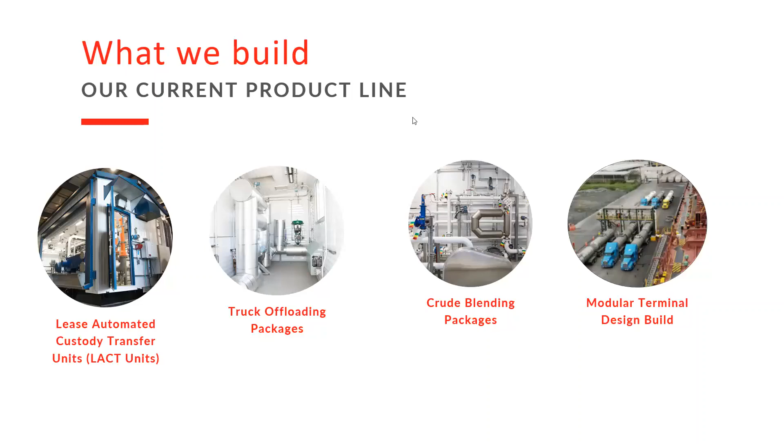Okay, so the quick version of who Sky is, if you haven't had those introductions, and what we do: you can see the variety of products and applications that we're involved with, from design, build, or concept ideas to fabrication and installation and assembly and ongoing services. So a variety of refined fuel applications along with crude oils, really depending on your niche.

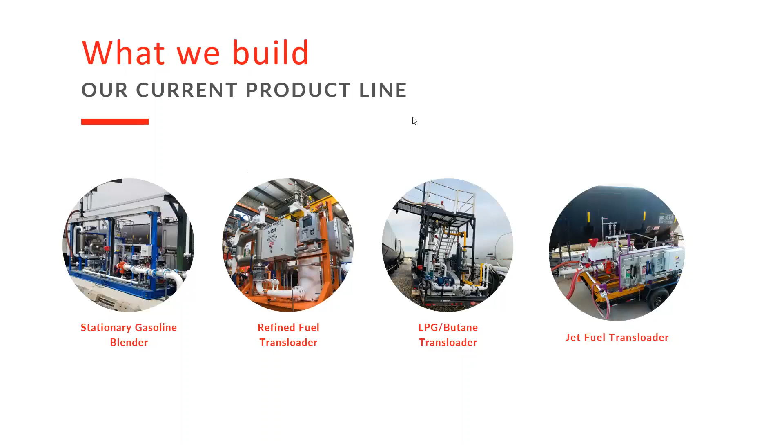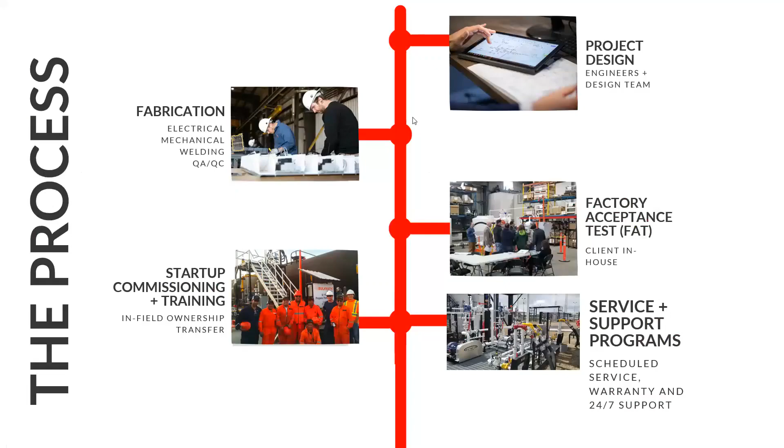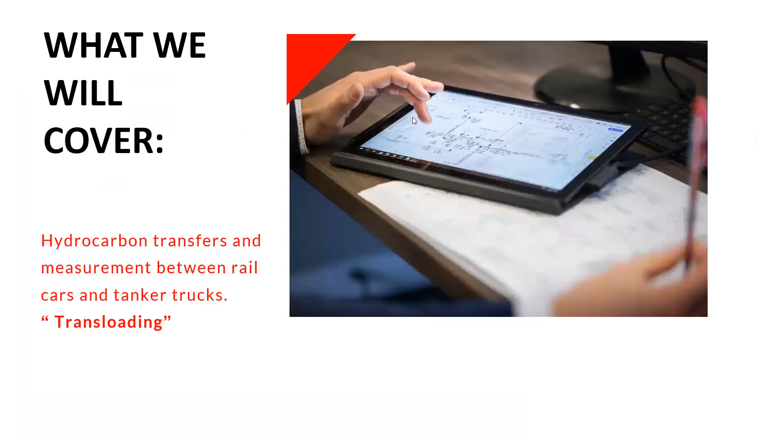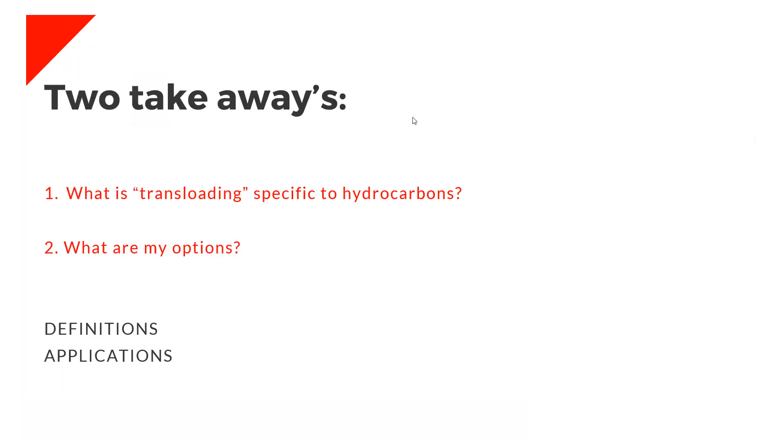Okay, to the topic at hand. What we're looking at covering here today is a bit of a basic or fundamental description of transloading and what that means for the people that we work with for the most part, and hopefully there's some relevance for you. And the goal we'll try and achieve here is, first off, hopefully you can take away an understanding from our perspective of what transloading of hydrocarbons means, and then really what are some of your options relevant to a variety of these products, be it crude, diesel, gasoline, and propanes.

And to put it quite simply, transloading, just to pull it out of Wikipedia, is really just the process of transferring shipments from one mode of transportation to another. And to keep it that simple, what we're going to try and do is give some perspective through the supply chain that there's many different scenarios that these commodities can be going in and out of those modes of transportation.

And what we'll try and show you is some solutions for those, not only in the transfer of, but the measurement of the products. So certainly on the crude oil side, you've got your production, and then we have refining, then we transition off to the refined fuels. And as you all know, in the variety of industries that you're in, the products can go in and out of those modes of transportation many times. So we'll try and clarify some of that for you.

John, what's an example of that, as far as an experience that we've had where we've loaded LPG here in Canada and then it's arrived in Mexico? Yeah, it certainly happened for us. Canada, with low commodity prices, we're really a source location for products. So we've literally loaded LPG into rail cars from trucks in Alberta and offloaded those same rail cars in Mexico. And that was to our surprise. So it's a big world, but it isn't really at times.

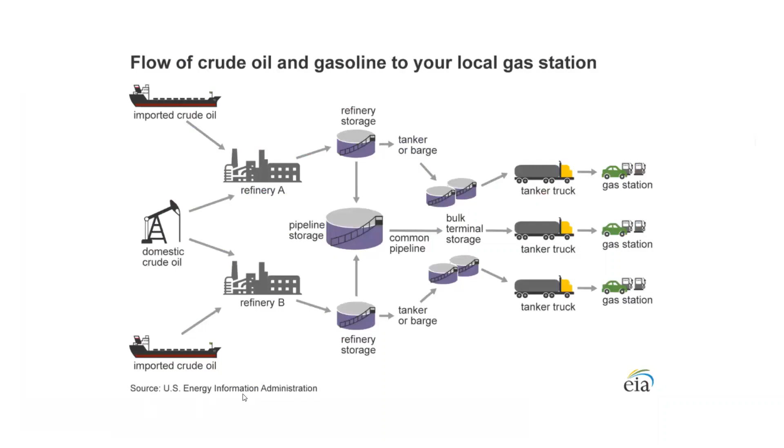So we hit that last mile. Certainly do. Mexico. Yeah, the final destination is typically retail consumer, but some industrial. And I'll try and show examples of that throughout. So we go right back to the beginning source for perspective for some folks. Maybe we've got some people that are in the trading firms or commodity traders, et cetera. This is really where it all starts.

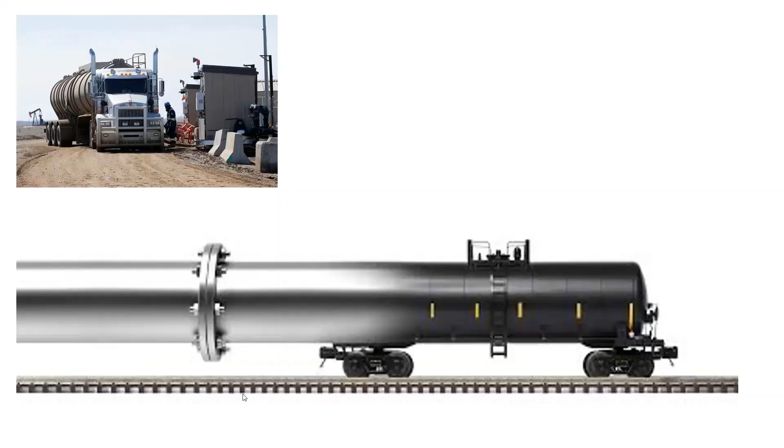We've got well site production volumes. They're going to be cleaned up somewhat to a clean oil state, and literally you're transloading that in a sense, or transferring it, potentially metering it, a lot of times into trucks. Could be into pipelines, it could be into trucks and pipelines or some sort of infrastructure. But the point is that throughout the supply chain, rail certainly does play a factor. So we're going to reference rail and truck specifically on this webinar and try and give you some examples of how we execute those applications and a variety of builds that we do. Where rail fits into the supply chain process.

You bet. This is a good little diagram of the variety of transload, if you will, or the variety of transfer solutions that can happen. We build LACT systems, of course, as well, and we do get involved in ships, but truck and rail is what we're going to focus on, and it can go many times in those forms.

What about, have we engaged in any type of barge or marine? What does that look like? Yeah, very similar at times. Potentially ship and barge might be transferred in higher volumes, and larger equipment, certainly. And it's all economies of scale, right?

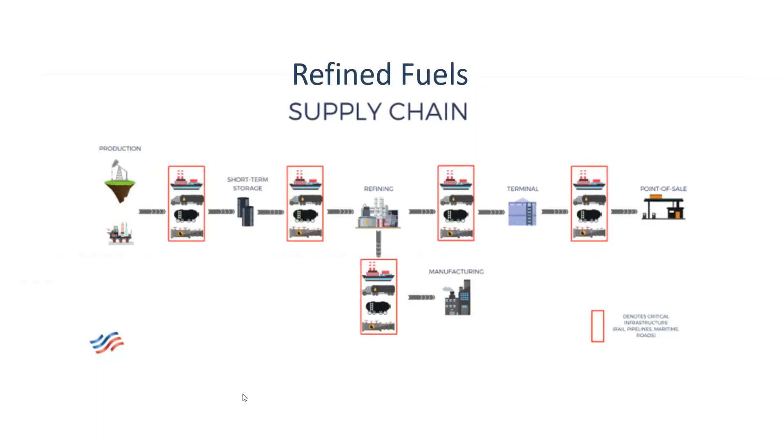We certainly know that pipeline is an economy of scale, the most efficient form of transfer, best bang for your buck, if you will. Then really, depending on geographic locations of consumer and provider, ships play a part, barges play a part, then you move into rail, and then you start moving into the trucks. And so many times it's in and out of those more than once.

So at a very simple level, we have trailer units, rapid deployment, lower cost trailer units, and these can be executed quickly, very common. But we'll show examples of how this is morphing into modular build, stationary equipment, and then larger terminal facilities. Then we'll try and point out some of the things to keep in mind in these scenarios.

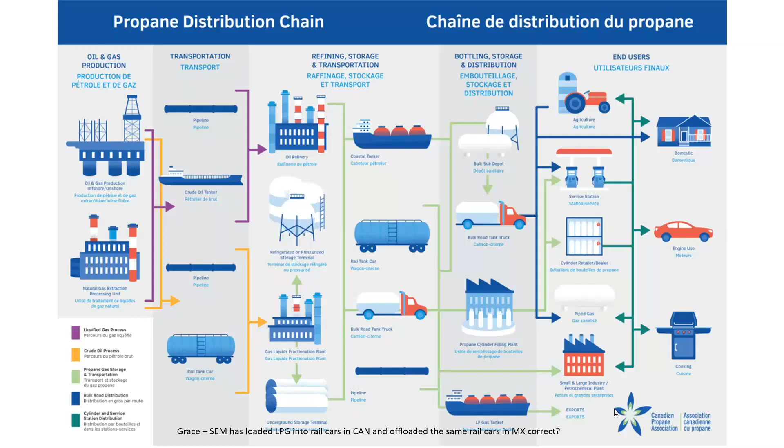And of course, final destination, really on the refined product side, we're right down to retail consumers. And then I'm going to include, of course, the LPG or high vapor pressure applications of refined products. Very similar at times how these commodities are moved, the propanes and the butanes. And they do go in and out of different forms of shipment, pipe, truck, rail, and ship. And we'll try and work on some of those fundamentals here also.

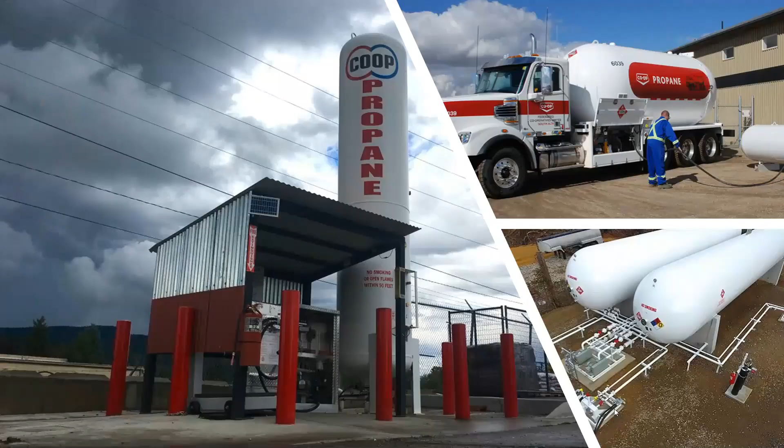There we are, we're transitioning from rail to truck for final delivery. And that's an example of a transloader trailer unit, portable unit, to execute that task. And again, back down to retail consumers or industrial. There's a variety of industrial applications outside of the retail, home heating or offices or power generation, etc.

So let's move on to the next phase of transloading. We've talked a little bit about what it really means in the hydrocarbon space relevant to crudes and refined products, in that it's a form of transfer and measurement of it. I think we'll move into a little more detailed perspective of the techniques used, or the equipment used.

Do we want to take a couple questions? Were there any questions in there that we wanted to, maybe prior to getting into this next piece? Sure. Let me have a quick look. Let's see. Well, okay, what do you got, Grace?

Well, from James here, will you be going over economics in comparison of average cost per barrel to pipeline to understand the difference? Well, what I can do is give you some perspective of cost, and we'll keep that in general terms, and certainly let's follow up outside of the webinar to try and put some of that in play for you.

I'm not going to have economics on pipeline movements or ship rates. We can certainly tell you our costs for the equipment to do the transfer and measurement in a variety of scenarios, but I don't understand the rate costs on the commodities. We get into the solution to design build portion, but we can certainly talk in the future, James.

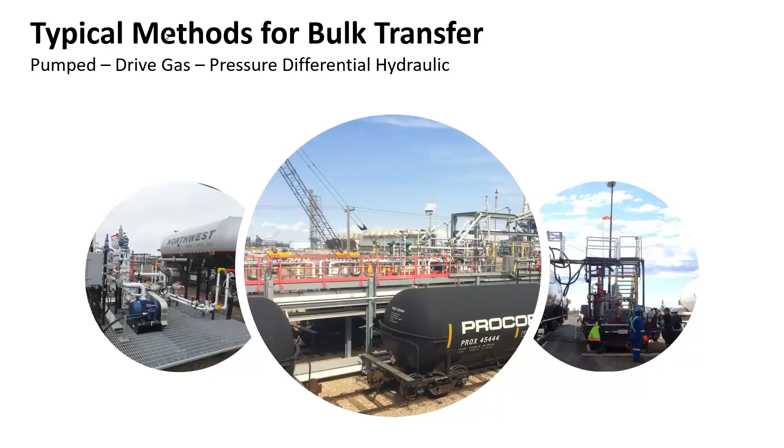So typical methods of transfer. Again, we're going to keep this very simple and narrow right now, and focus in on general categories, if you will. So from a crude oil or condensate perspective, when we start to look at designing, and our engineering guys have to get involved and put some clarity to the application, we categorize crude oil and condensates, stabilized condensates, as a low vapor pressure product or a liquid form, and they're going to be pumped.

Now we separate crude and condensate just a little bit from the refined products because it is raw crude, and there could be solids, it could be sour, it could be water. There's a variety of contaminants that can be in that product that we deal with a little bit differently than we would the refines. The refines are coming out of their consumer spec, to a certain quality level. So the equipment is a little different, but very similar, but it is a pumped and inline metered application.

So we categorize low vapor pressure or stabilized liquids as one type of transload application. And then the other would be high vapor pressure product or non-stabilized product that's under pressure when we transfer it. An example would be propane. And most often when we're doing truck and rail transfers, we're using a compressor and hydraulic differential pressure.

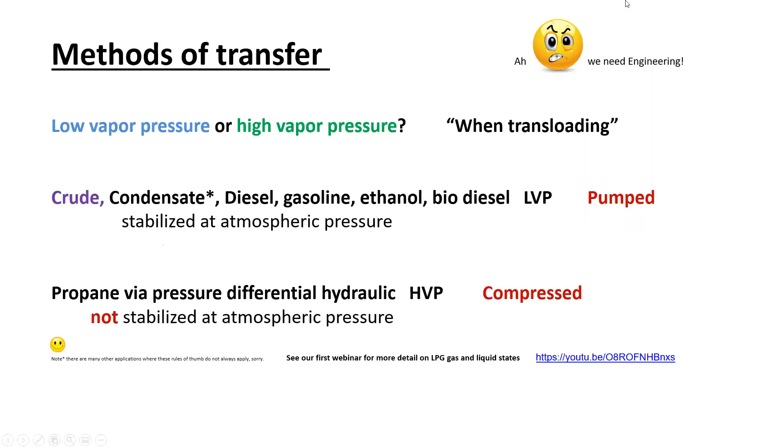Okay, so we talked, and I'll show more examples of how we're moving with compressors and pumps, but the other component to these transfers, because there's ownership changes, there's government involvement on where the product's going, it's very important for people to be measuring these volumes and these exchanges and transfers very accurately. So measurement comes into the equation here.

So on the stabilized liquid crudes, we're pumping them, yes. We can inline meter those very well, very accurately. You can do that metering via mass or volumetric measurement. But we categorize this scenario into custody transfer on the crude oils and the condensates, where those are a raw commodity between two knowing parties and the regulatory groups, versus refined products, which is a different category

or a different tier of measurement, a very specific set of requirements you need to meet for that transfer of ownership or exchange. In Canada, it's Measurement Canada, NIST in the US, and then NOMs et cetera in Mexico. So there is a nuance there, but certainly inline measurement for both applications, similar equipment, similar accuracies, but there's a slight difference between crude and condensates versus true refined products, your diesel, gas, and ethanol.

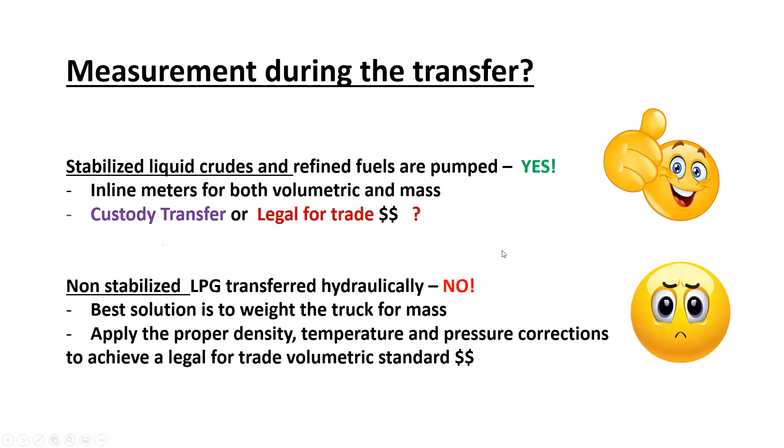So you've discussed that a little bit. We're using different equipment, obviously, to transload and meter a diesel versus an LPG. I think we'll hit on that maybe on the next one. Certainly, yeah. I think we're going to get to examples of, quite simply, basic pictures of the modes of transfer.

On the liquid side, we talked about pumps, and on the high vapor pressure or propane side, we talked about compressors. And really the compressor is doing a pressure differential. We're going to hydraulically move that liquid propane through a pressure transfer from one vessel to the other. And again, our first webinar does a great job, I believe, of describing that. There's some visuals, and we go through it very well.

Yep. Now, not all things for all solutions. If you get into cold weather butane applications on their transloaders, we add a pump because the pressure properties of butane are going to keep it in a liquid state. And now you need to pump it. Yeah. So, all day long, no problem for us managing that piece. Yeah. We do that, certainly.

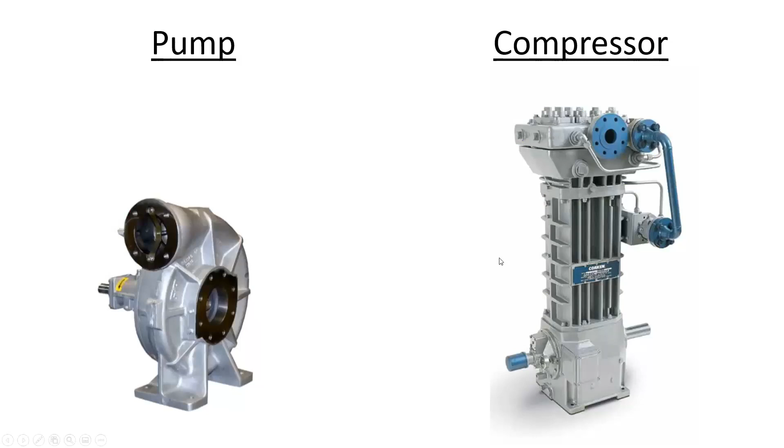Yeah, it's the brains of the operation. Absolutely. You've got that central controller. You're going to see it on the transloader examples here soon. And that's where all the sophistication is. That's where the operator goes to input information and to get information back. And there's a set configuration or a set logic to execute the transfer and measurement.

In the refined space, it's very prescriptive, and it's as prescriptive with the regulators, and know that we have to physically lock out these units so that can't be changed. It's a very managed application. At the end of the day on refined products, what you're trying to do here is maintain the integrity of measurement, not only for government regulatory and taxation purposes, but for the final consumer, the unknowing parties.

And the partner-to-partner exchanges leverage that, and it works out very well. It's very well known in Canada, the US, and Mexico, and very well documented. It can be executed over and over again with very good repeatability and reliability.

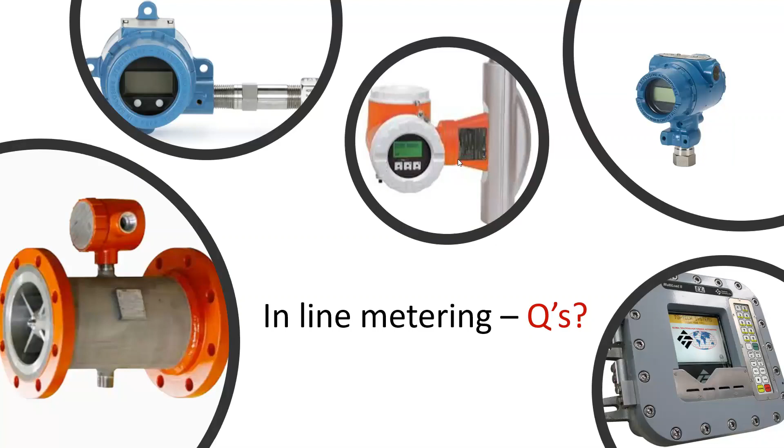We do have another question here, hey? Sure.

Oh, we got one here from James again. Do you see challenges in proving Coriolis with small volume provers, and how are those addressed? So, proving Coriolis meters with small volume provers, what are the challenges, are there any, and how are they addressed?

Well, at the end of the day, in the proving applications, what we find is your crudes and condensates, a little more volatile condensates, are probably going to present some challenges that you may not see in your refined products, which are stabilized. For example, if we're in an upstream application with condensates that are seeing pressure and temperature drops, then we may see two-phase flow. That can affect the performance of the Coriolis meter. It's not an issue with the Coriolis meter, it's an issue with the process conditions.

You may not see that two-phase flow or tendency to flash the light hydrocarbons on a diesel because it's much more of a stabilized product, right? A much lower vapor pressure. Now, how does the small volume prover, is there an issue with that?

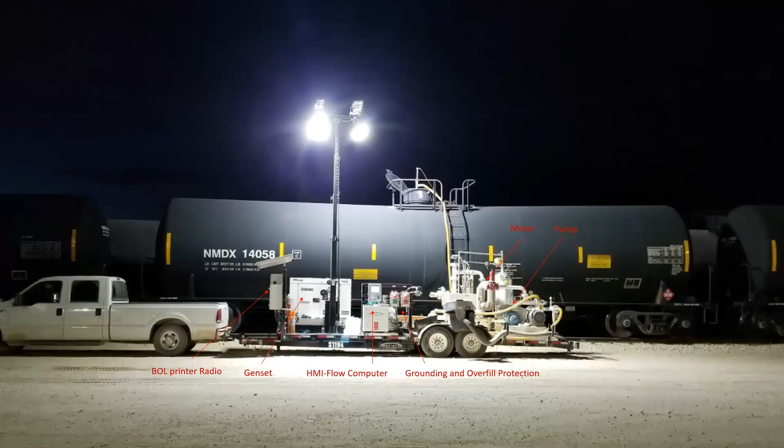Here we go. So let's look at a rail to truck or truck to rail application of crude and condensate, and here's a transloader, right? Here's an example of a physical asset that will do that custody transfer measurement and will allow you to do that form of movement. This is in a manifest portable application. You're seeing the components at a fundamental level. This is an independent package that has its own generator.

The HMI and flow computer, which is the operator interface, that's where he goes to put in information and get information back. It also holds all of the logic to run the system safely, to protect the equipment and to do the proper measurement. So that's really the control function or spot. Tethered to that preset will be a ticket or bill of lading printer, or you can have a radio link to a terminal system, because you need to have evidence of the transaction. Of that transfer. Certainly. For the operations group that day, and the truck driver needs to have that as well.

So I like to call these autonomous systems. The power is on it, you got lighting, you've got the pumping, you've got the measurement, you've got all the safety control systems like the grounding and overfill protection devices. So in this case, you can see the cane probe at the top of the rail car. This application was production volumes coming to the rail car, clean oil, and what you don't want to do is overfill the rail car. So a second layer of overfill protection is the physical cane probe device that will detect liquid if you've gone in excess of what you expected to.

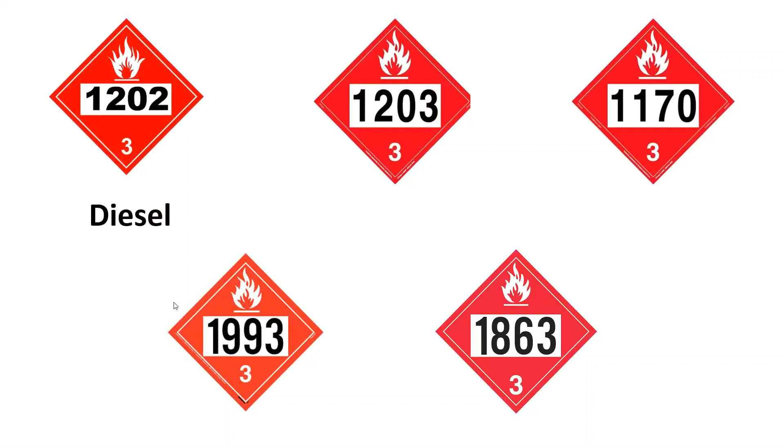So again, still in the low vapor pressure liquid state here of transloading, a variety of products, of course. Now in the refined fuel space, still inline metered and still pumped. And we'll try and show some examples of what a transloader might look like. And we're going to move a little bit away. We're going to graduate on from portable transloaders on trailers.

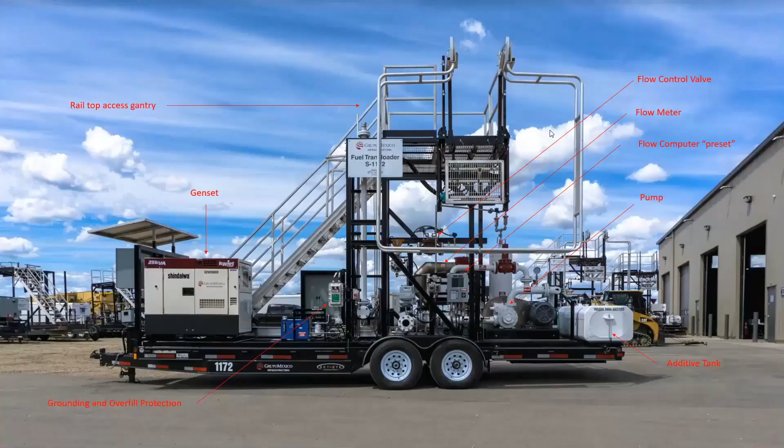You're seeing all the same sorts of equipment. In this case now, we're using load arms, the grounding overfill protection, very similar builds, air elimination, very similar to the crude and condensates. Lots of sophistication here. Now we're stepping up our game. So I'll try and describe what's going on here. This is, again, a manifest portable transloader of refined fuels, but we've added some more equipment to the mix here.

You're seeing a rail top access gantry. So in the prior slides, the operations group would go up the ladder of the rail car. In this application, they've got the benefit of the gantry and access to the top of the rail car here with this equipment, and it's a phenomenal thing. It just costs money, right?

So you've got to gauge your requirement: do I need to outlay the expense of the rail top access gantry? And there's times where we're not offloading rail cars from the bottom, we're offloading rail cars from the top. So in that case, you most certainly need the gantry.

Where we do see the gantry being defaulted a lot of times is in the cold weather climates, Canada and the northern US. It's difficult to ask your operations groups to day in and day out climb the side of those rail cars in the winter and do what they need to do. So right away the gantries are in play.

Again, we've got the genset. So this is an autonomous system. You pull it to location and you're running. Grounding and overfill protection again for both the rail side. So we're grounding the rail to the rail track, the rail grid, the rail cars, and then we're also grounding to the trucks on the truck side. It's very similar: flow computers, pump.

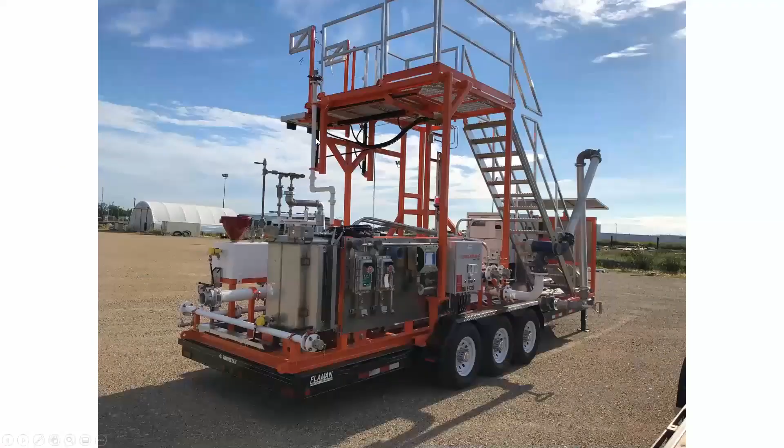Okay, so here's examples of a refined fuel unit, a little more equipment. Again, another gantry style unit. We design and build these, of course, in Canada. They literally get pulled all over North America to site. They're a little tall to put on a low boy trailer, but you drop the hand railing and it meets the envelope to get on the highway.

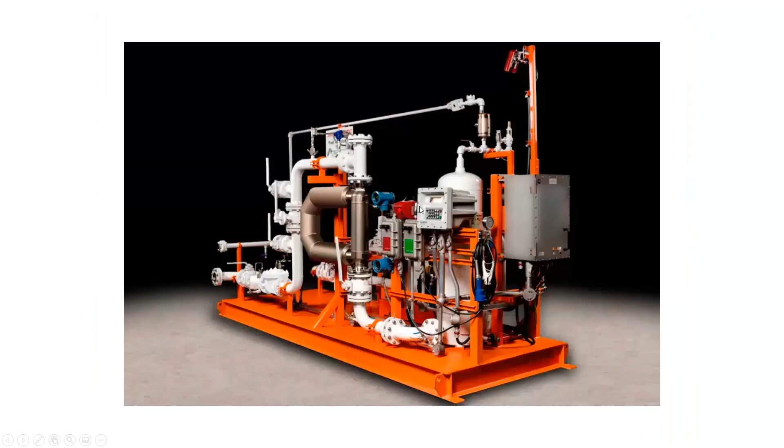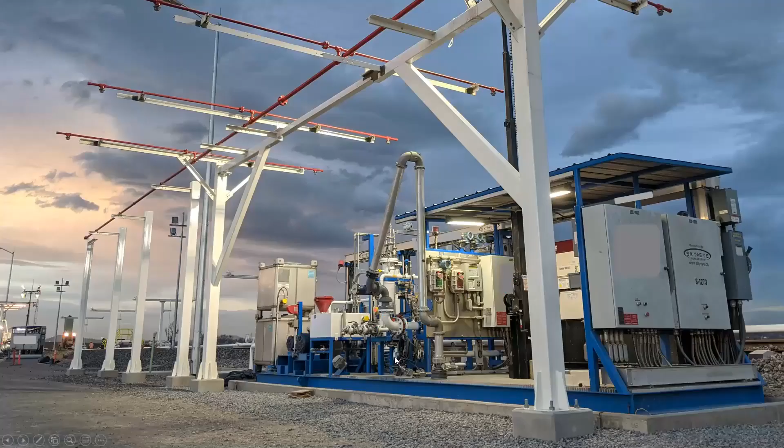Now let's transition to stationary equipment. So in this situation, if you've got a set of rail cars and a manifest application, you might put a header system in between the rail car and these stationary transload units. So you can think of just taking it off of the trailer, putting it permanently on the ground, connecting it to a piping system. The piping system connects to the rail cars.

And here we step up the game a little bit. We've got multiple additives, we've got multiple header connections, and in this application, we're blending as we physically fill the truck. For instance, you might be blending up to 15% ethanol as you fill one compartment. That truck's off to deliver gasoline with an ethanol blend.

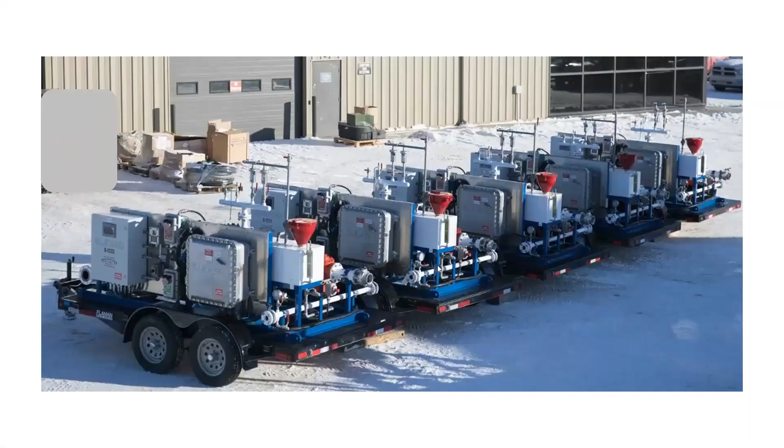Beautiful. So not only are they transloading on trailer units and pumping and measuring, there's stationary equipment or modular design and build. Really nice example down in Mexico of a Jet A application. So all forms of those commodities you're able to execute.

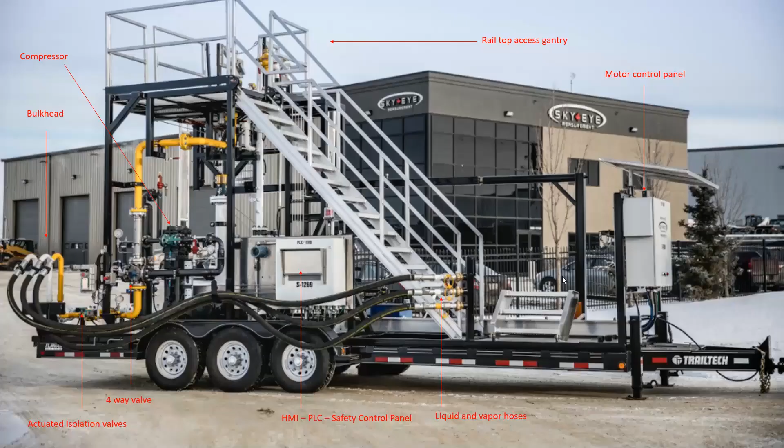Okay, so propane. Let's make the leap from low vapor pressure liquids to the high vapor pressure applications. So here we go with a higher bar of engineering. First off, from a safety perspective, we're dealing with a pressurized product and 300 ANSI piping systems. There's an expansion rate. There's a real safety component here that you need to start with. From a design and build perspective, we come with a safety focus first in our engineering group, and then we move on to performance and reliability.

So in this application, things that you're going to want to key in on when you're dealing with high vapor pressure products, as prescribed, are things like bulkheads and the compressor for moving it through pressure differential. And then there's a variety of safety systems. That could be the actuated valves and snappy joes on the rail top side where we're going to isolate. We've got the breakaways and things. So again, if you go back to our first webinar, we dove deep into all of that, all the regs and specs.

But this is an example of a propane transloader where you can physically move from truck to rail, rail to truck, and it is autonomous again. The genset goes right in this spot here, so you literally can pull that down the highway. And the benefit of the compression system versus a pumping application is if you've overfilled your rail car, for instance, if you're going truck to rail, how am I going to get that propane out of the rail car? With the compressor, you can achieve this.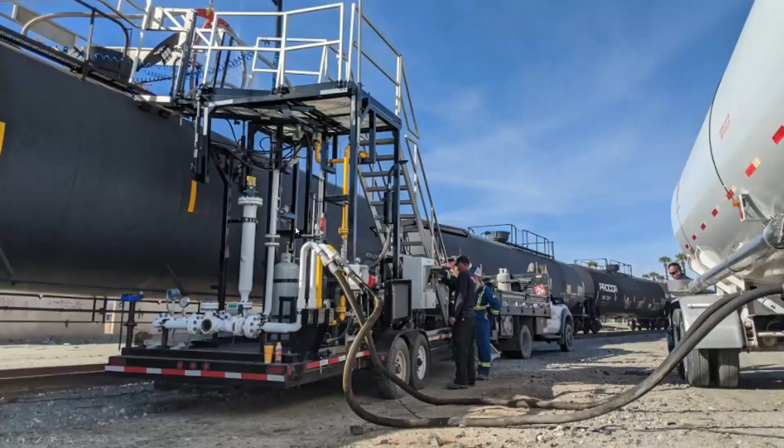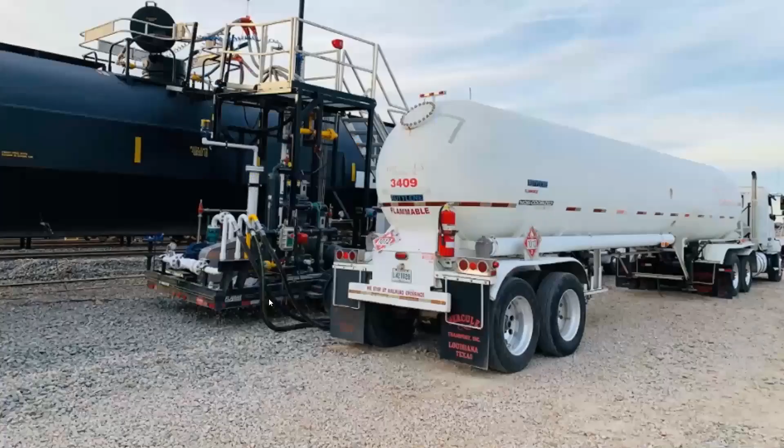Some more snapshots. You can see the access gantry. The same access gantry as in the refines is used on the LPG, and this is electric over hydraulic, so this ramp hydraulically moves in and out and articulates up and down. There's more rudimentary systems. This is just an example of where you can go with the equipment. So it's all in the name of efficiency, safety of your operations group, efficiency of your operations, and performance throughput, right? It's all about moving that product. More examples.

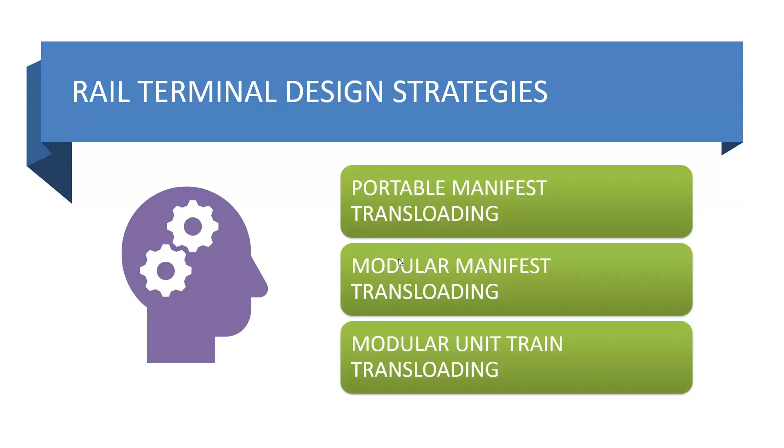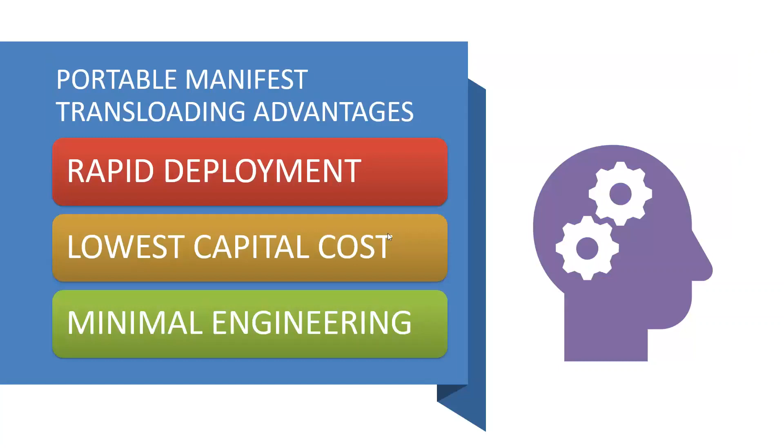So we've got, I would say, a few minutes, and I'm just going to run with a quick blur here of transitioning from transloaders, the different types, the different applications, some of the little fundamental things, to how we see facilities being designed, whether that's portable, modular, or large unit trains, and how transloaders can play a part in that. And again, some of the high points on those trailers: rapid deployment, low cost of capital, not a lot of engineering to get you going, and bang, there you are.

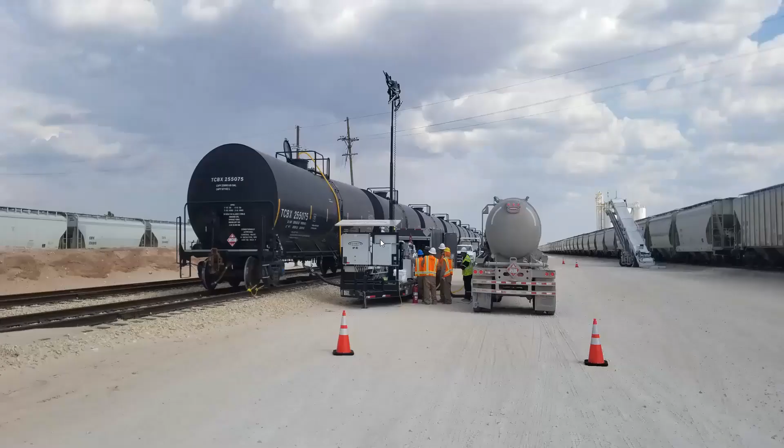In this situation, a beautiful frac site was now being leveraged for crude oil volume movement. Well, that's an 80-car lineup. That's a beautiful thing. And now what you can do is execute these transloaders. All you need is transloaders and trucks and your operations group and the volumes, and you're working, right? And I want to move more of it, faster, lots of it, scale it. More transloaders, more trucks, more rail cars. So the geometry of this location allowed for that.

So this at the end of the day is how we play a part in the early stages of people moving into areas or during short-term deployments, right? Quick solutions. And what are the factors? Geometry of your location, how much volume do I want to move, how many hours a day am I going to work, do I have good truck flow? You've got to connect the logistics of truck and rail and align that with the quantity of transloaders that you have.

The movement of the product, if you want to talk about performance, you can really think about somewhere in the neighborhood of 300 gallons per minute to 400 gallons per minute. So about a cube a minute to a cube and a half a minute, very typical and very acceptable flow rates in and out of the trucks and the rail cars in these applications.

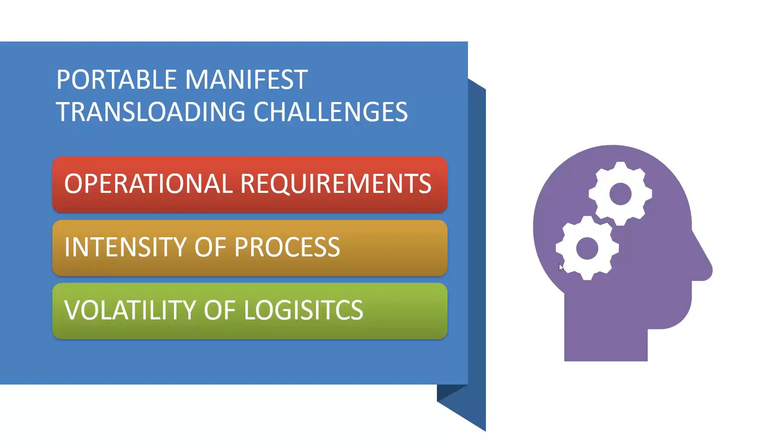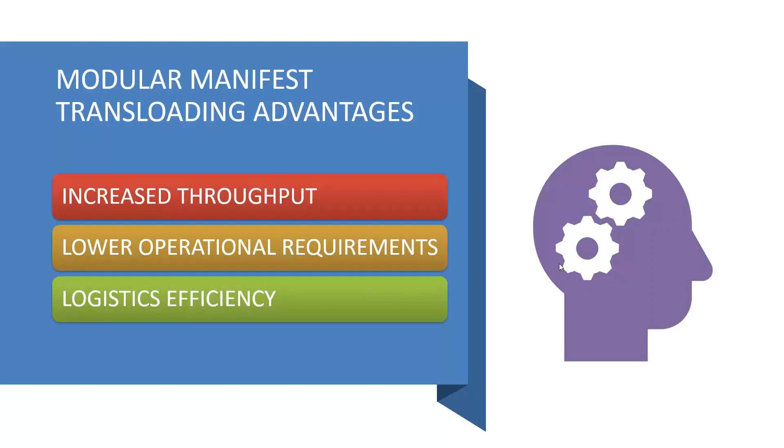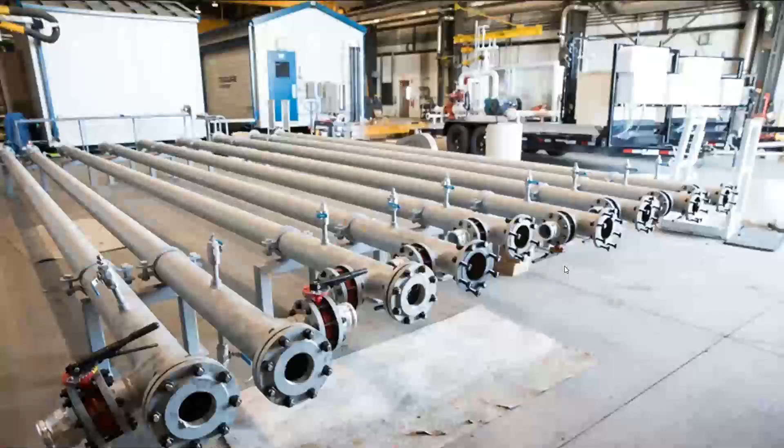For us, graduating that to the next step, here's challenges, like intensity of operations and volatility of the trucking. But I'm going to move into the next layer where our clients have taken us through time: I need to move more efficiently. I need to move more equipment. I have a small location. How am I going to do this? I have multiple products. So that's where the modular builds start to play a part, where now I'll start landing maybe single pipe headers, multiple pipe headers in modules, and I'll leave the transloader stationary and I'll move the rail cars and the trucks.

But I can connect to a variety of rail cars at any one transloader unit, and that's through a multiple header scenario. So how many headers? We've gone up to 4, and sometimes we're blending one commodity into the other. Sometimes 3 of those are 3 different products. It could be premium, regular, and a diesel. And then we might have a blend, right? It's really up to the client, what suits their applications, what they're trying to achieve.

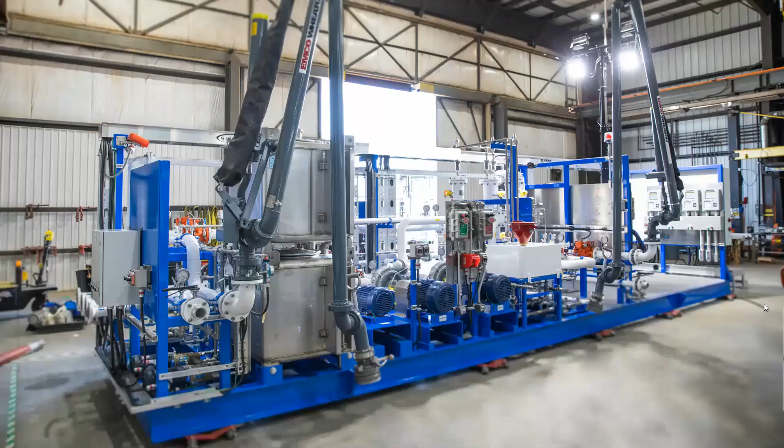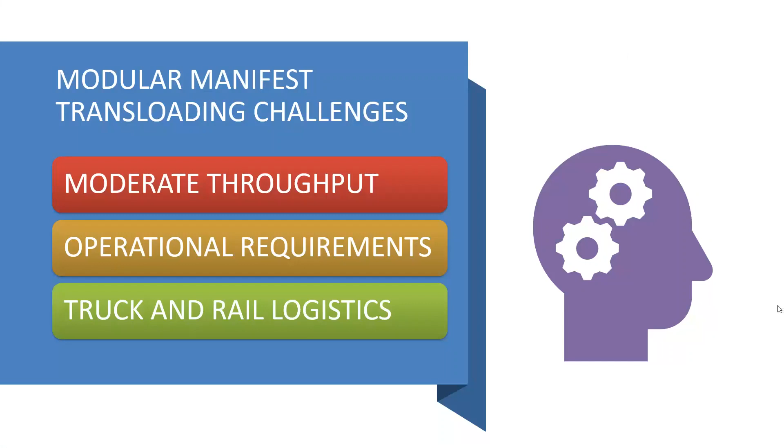So, the trailer looks a little bit simple at times, just a pump and a meter. Things ramp up real quickly when you start doing inline blending and multiple commodities and additive injections and things. And we've got examples here where we're 2 compartment trailers, we're crossing arms, and this is a benefit to the client, right? At the end of the day, they were able to achieve the higher volumes and the production throughputs without building a big facility. So modular manifest is what we call that.

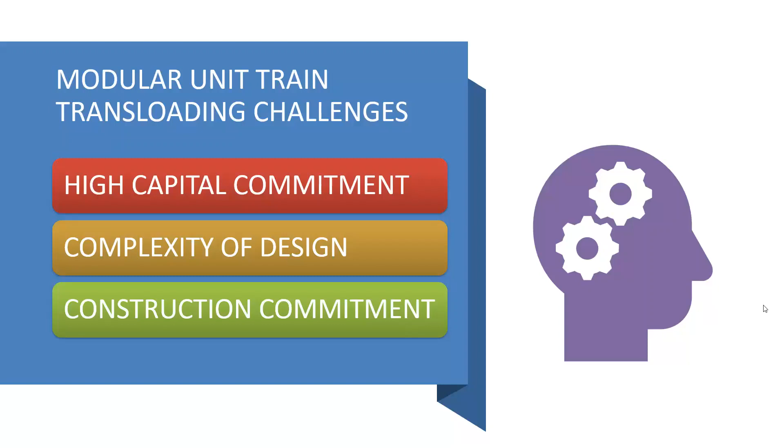Then of course, more traditional, if you want to move the highest volumes with rail and truck, you start moving into unit train permanent builds, right? And there's methods of executing that, modular formats, etc. But now we're talking. Now we're moving 70, 80, 90 rail cars, permanent infrastructure, maximum efficiency, optimizing your operations groups. This is what it's all about. But as you can see, high capital commitment, complexity of design, and then construction commitment. So that's when we talk about transloaders and the small to the big, there's a variety of ways to apply.

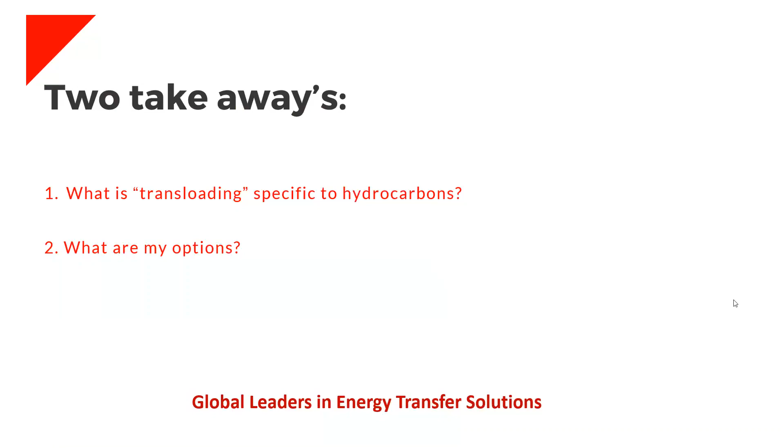So I think we're getting close to some Q&A. Hopefully we did a good job of giving a clear explanation of transloading of hydrocarbons. And hopefully we were able to give you some examples of options, whether that be crude, condensates, refined liquids, and some propane. And a lot of times what's driving that is your business case, right? Do I need to do it for a short period of time? Is it a small amount of volume?

Or am I here, for instance, and a lot of our friends in Mexico are doing serious volume commitments for long-term builds. And they're going from ship to tank to truck. And that's still transloading. And it's the same pumps and meters for the most part. Sometimes it's just bigger, right? Bigger pumps and meters.

We got one more question here, I believe. Okay. Sorry guys, here we go. Which one do we want to grab here? Okay.